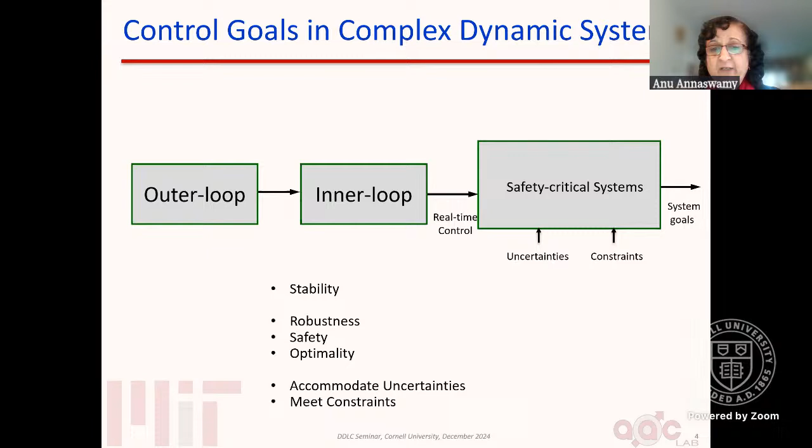So we've been doing this for a while, and we always start with water clocks and steam governors as a starting point. And so the idea of shaping the performance of a system is something that is part and parcel of any of the systems that we have designed, and we have always used data in order to really take that forward. And fast forward several decades, and the same principles are what we explored in the impact of control technology report that Nishant mentioned.

And so the idea here is to show that these control of physical systems are really not relegated to just a few sectors, but it is really across several domains. And in all of the cases, the success stories are really brought to the forefront. And that was basically our thinking in these reports that we wanted to showcase. And there's a variety of examples that we drew from different kinds of applications. And that's what you see in here.

And so we wanted to go on to talk about not just these kinds of sectors where traditionally people have looked at it, but the ones that went beyond and looked at various kinds of smart infrastructures. And all of these are basically providing a nexus between the digital and physical worlds. And it's not, of course, surprising to see that the boundary of what controls can do extends far beyond. And so we also looked at how societal scale challenges can be addressed. And indeed, many of the things that we're doing really sit squarely in the middle of these kinds of endeavors and are integrated with these societal drivers.

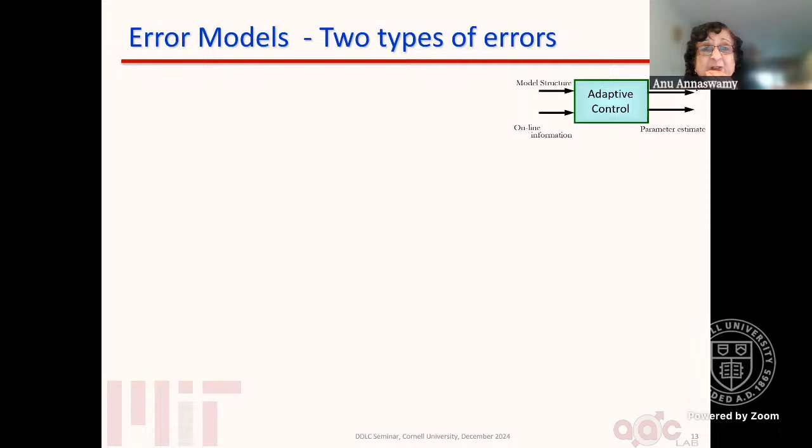So let me walk you through some specific example. And the way it does that is really to look at it from the point of view of two kinds of errors. And so you look at the model structure and the online information, and all of that gives you something called a performance error. It's something that you can measure and you can reduce, and it's something that needs to be reduced. Whereas the other kind of error that is implicit in it is the one that you're trying to get rid of. It is the parameter error. And so it is unknown, but because you adjust your parameter estimate, you can basically adjust the parameter error.

So how do you design the learning rule in a way so that this performance error is reduced is really the way in which the storytelling happens in adaptive control. So these quantities, the parameter error that you have and the performance error, are not always related through a simple structure. It really depends on the underlying dynamics and the underlying complexity that you have in the system. So the error model is the entity that basically relates these two.

And therefore, you have to be able to contend with the kinds of complexities that you have in this W of S, which might not even be just a simple dynamics. It can have nonlinearities, et cetera. And so how do you then leverage the structure that you have to design the learning rule? You could translate the problem of designing adaptive control systems into the goal that I have listed over here.

For example, if you have a very simple linear regression problem, and even though it's simple, it actually is ubiquitous. It appears in a whole bunch of estimation, prediction, learning, optimization problems. And so if you have that kind of a relation, you leverage the structure in order to build an estimator. In this case, the performance error is just the difference between y and y hat, the actual output and the estimate. Now, the parameter error is the difference between the unknown parameter, the linear regression coefficient, and what you estimate it to be.

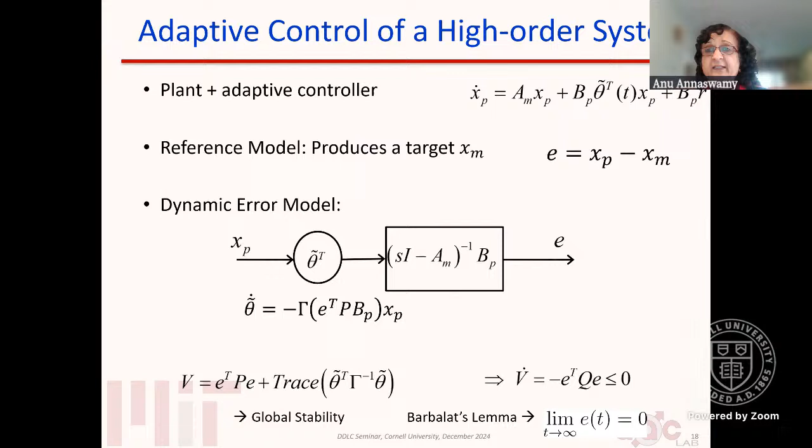But without going into all of the details, the big picture here is that here is a learning rule, and that learning rule is something that was specifically constructed using the structure of the dynamic system, yet it is able to come up with a control strategy for dealing with a parametric uncertainty that occurs in real time. That's sort of the story in here.

So the same kind of idea can be extended even when all of the states are not accessible. So when you have, say, for instance, just a transfer function, and that transfer function is the one that sits between the input and the output, and it's still linear. Problems are still linear here, except that now you have to figure out a way of stitching together a controller with an observer, and that's what the structure is.

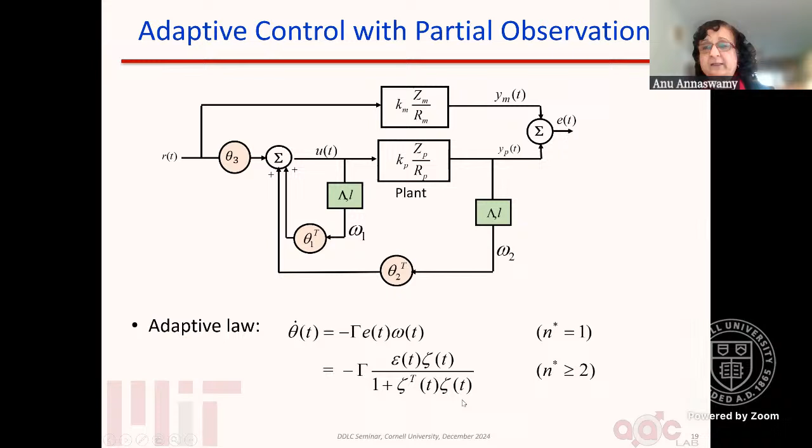And here is the adaptive law that basically looks at the error E, and it collects all of the states that come from this particular observer structure, and that simply turns out to be the answer. The problem becomes a little bit more complicated, I'm not going into all of the details in here, when there is more lag between the input and the output, but suffice it to say that one can design these adaptive rules. And you can show that the performance error indeed goes to 0.

Now, you can extend the story to when you have nonlinear dynamics as well. And so if you have an unknown nonlinear system that looks like this, then you leverage some structure, and often there is an underlying linear parameterization that sits. And so in that particular case, you can leverage that linear structure in order to design the nonlinear control rule.

And you can have the certainty equivalence principle basically carry over, which is that even though you design this feedback linearization with unknown parameters, you simply staple together that control structure with the parameter you replace by its estimate, and that will lead you to the solution. And you can come up with a rule for adjusting the parameter estimate. And when the feedback linearization structure is not available, you can actually leverage.

So okay. Before I go to that, certainly here we assume that the phi of x is known, but sometimes that's often not known. But you can sort of see elements of connection to neural networks in here, in that if you have a linear single layer network, that basically is what we are saying is the structure of the nonlinearity. And so if that assumption is valid, then the adaptive rules that I'm talking about here are valid.

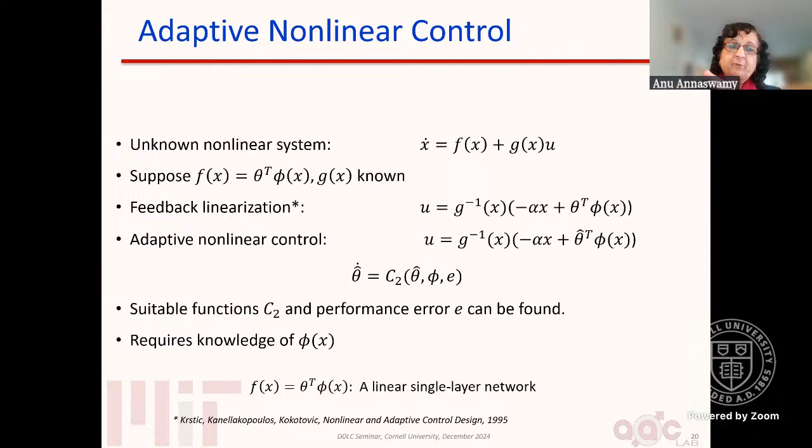So there are many other such extensions that people have derived. And that really is articulated very nicely in this book, which was written again a few decades ago. And that basically expands on the notion of feedback linearization and says, even if you don't have that structure, you can use this technique called backstepping that allows you to essentially keep propagating the analysis backwards until you actually design a control system where the actual input shows up, and that backstepping allows you to figure out what that process is by which you recursively keep tweaking your Lyapunov function candidate.

So just to give you a very specific example, okay, now that I've told you that there's a theory and that there's a body of work and that it's articulated based on some rigorous analytical principles, a lot of which are built on stability notions and, of course, Lyapunov stability. And there are other kinds of stability characteristics that people have leveraged as well. I just want to sort of shift gear a little bit and show you what is it that happens when I actually implement an adaptive controller.

So this is the one that I just want to show you, a short video, and hopefully it'll play at your end. And so what you will see is a quadrotor. And the quadrotor basically is controlling, you want to hover. And the challenge is basically that a part of the propeller blade breaks. And so that's the real-time anomaly that occurs. And so you want to be able to adapt to it. So I'll start off the video where you'll see a controller that is not adaptive.

Are you all seeing the image? Okay, I'm not playing the sound.

I don't think it's relevant, but you can see that it crashed because there was basically an asymmetric moment. Now, this is the adaptive one. And so even when the propeller blade snaps, you can see that the way we instituted that was to have this little razor blade pop up and cut a duct tape which basically reduced the moment arm, and that basically led to a roll imbalance, and then there was a yaw as a result, et cetera, et cetera.

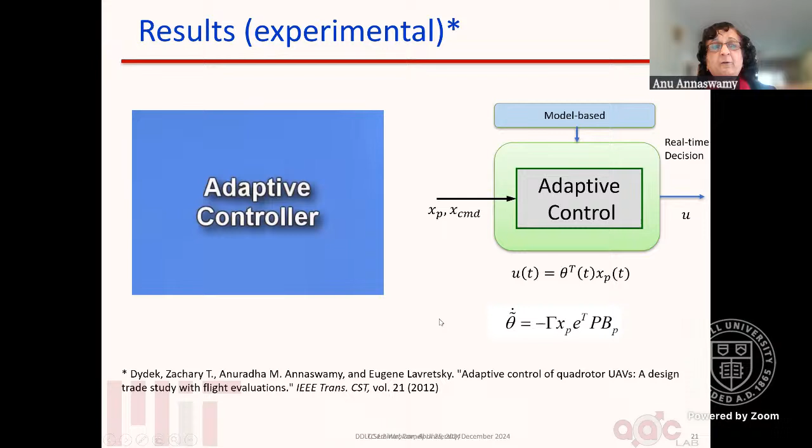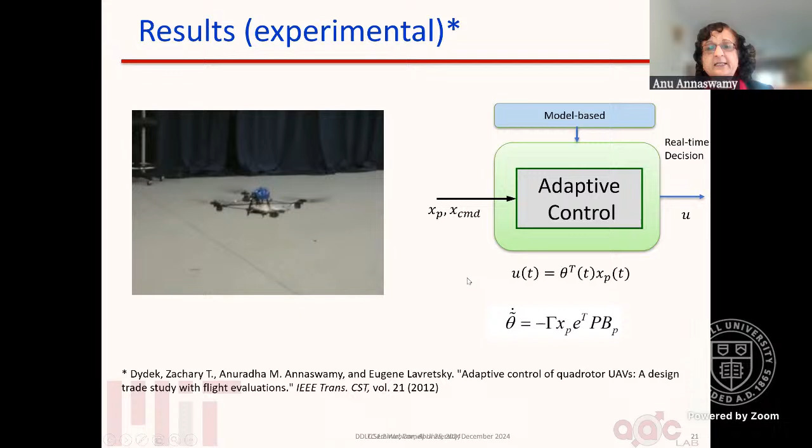So that's the kind of performance capability that the adaptive controller has, where this kind of an anomaly is prevented simply because of the software capability. This is the only difference, that the parameter estimate is adjusted rather than keeping it fixed.

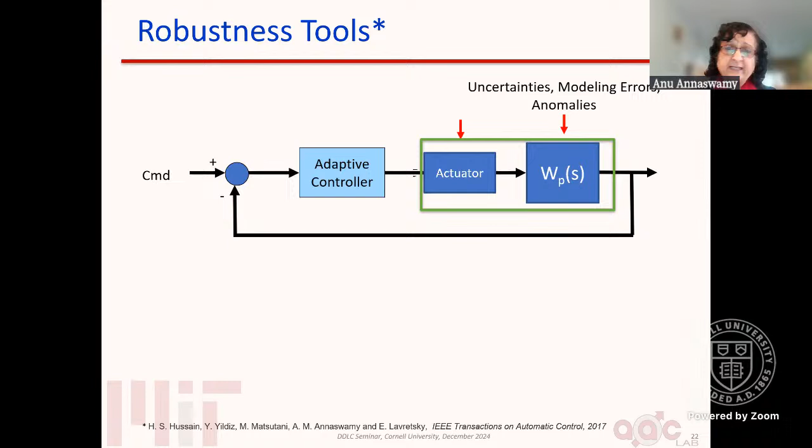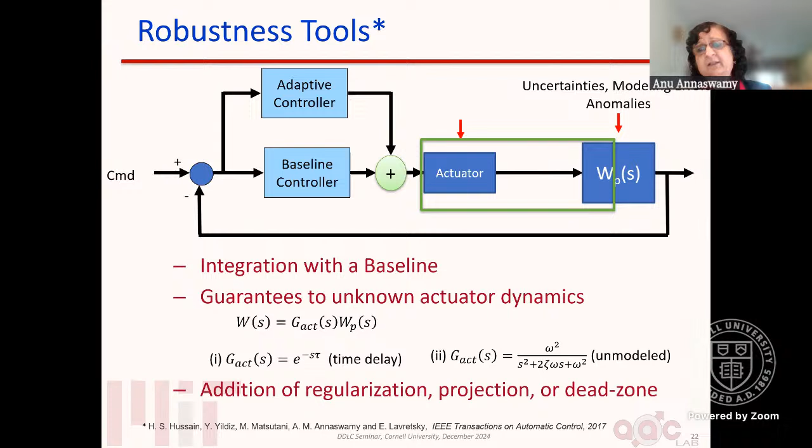So building further on these things, we can then have additional unmodeled dynamics as well. And these unmodeled dynamics basically are things that could happen due to unknown actuator dynamics, either time delay or because of higher order dynamics that are neglected. And it turns out that you can come up with a strategy that still keeps everything bounded and robust adaptive control is possible. And this is through adding regularization or a dead zone, or actually projection works out very well. We can also accommodate input constraints in the form of magnitude and rate saturation.

So here, for instance, the main idea is that all of these adaptive systems basically function in the form of an adjustment in the learning rule. And the adjustment in the learning rule basically is ensured by having a performance error as a target. So the construction of the performance error is important, and the construction should really be based on things that you can actually attribute to parametric uncertainties, right?

So when you have a saturation, the question is, is that something that you adapt to? Because it's a disturbance, right? It's something that is unintended. So you really should not adapt to it, and therefore you should modify the performance error. And that basically is what we did. And so in this particular case, the performance error is modified in some specific way. And when we do that, we actually can accommodate this magnitude and rate saturation.

And not only have we developed all of the fundamental principles for it, but a whole bunch of papers have been written where we explored it in various applications, in positioning systems, in combustion propulsion systems, in aircraft systems, and in all of them, it actually performed very well experimentally.

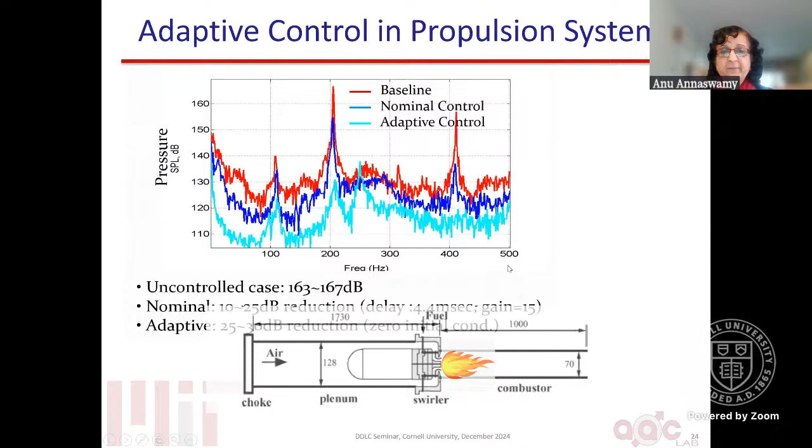And the really wonderful thing was that when we introduced adaptive control, which is the cyan color curve, and this is an experimental result from an actual Rolls-Royce scale rig, we were able to reduce this. Let me see if that goes away. Yeah, we were able to reduce the amount of acoustic resonance significantly, by 30 dB, where the adaptive controller knew absolutely nothing about what the system was doing, with no knowledge except for the model structure. We didn't know anything about the modes or the actual frequencies that were being driven to resonance.

This is the example with high-performance aircraft, where the idea was to not only have the angle of attack and the elevator angle act as a control input, but we also wanted to make sure that it honors a rate saturation limit. So you can see that our algorithm does generate a solution which makes sure that the performance is still reasonably okay, but it follows the command by keeping to the elevator limits.

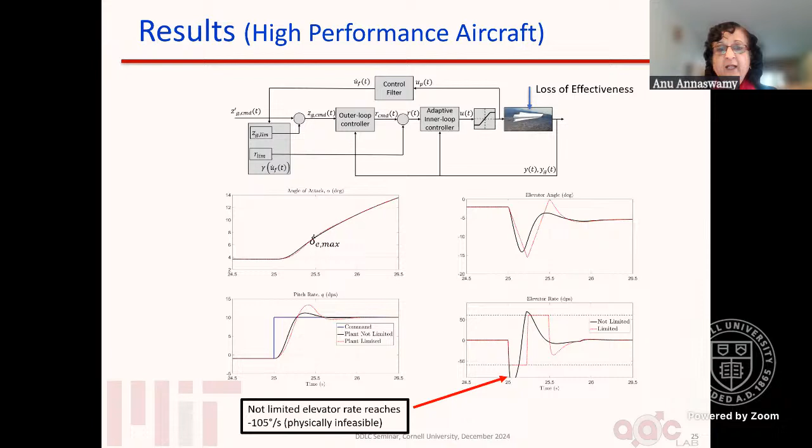Because if you don't do that, you're really going to burn out the elevator, and that's something that you don't want. And this is for a high-performance aircraft with high fidelity. And so you can see that something that is physically infeasible is avoided by having our algorithm, which accommodates the result.

And this is not the only example. There's been any number of platforms where people have done actual flight tests where adaptive control has been implemented in one form or another. And all of these are, of course, uncrewed flight control applications, and they all have led to improved performance and reliability. So that sort of sets the stage for what adaptation can do.

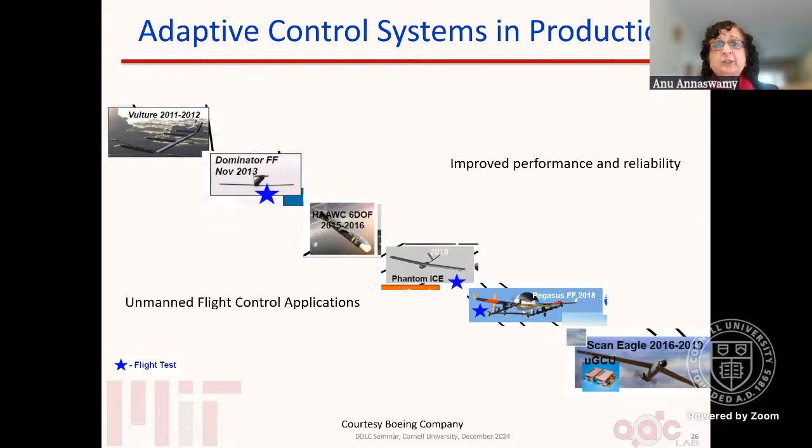So now let's talk about learning, right? So learning has always been part and parcel of any adaptive controller. We've always required that parameters which are uncertain are learned. So it's not an afterthought saying, oh, I'm going to do learning now. No, learning has always been a part of adaptive control.

And the learning occurs in the form of learning the unknown parameter. So there's a theta that is unknown, and that's the uncertainty, and you're trying to learn the theta, right? So this is what adaptation is all about. So remember that in all problems, if you're going to talk about a parameter that is unknown, and that's what is causing the uncertainty, then there are two separate goals here. You're trying to make the aircraft go somewhere. That's a control task. Or you're trying to learn the unknown parameters that are part of, let's say, the actuator. That's a learning task.

Now, one need not imply the other. And this interplay between the conditions that support control and the conditions that support learning are two different questions. And there are sometimes trade-offs. And this is what adaptive control has examined over the past 4 or 5 decades, right?

And it's also very clear for us why we want to learn the parameters. Because it gives you robustness, right? Because a small change in a parameter can lead to a huge change in the state space. And therefore, if you want to make a precise real-time decision, parameter learning is important because it gives you robustness guarantees. So this is very, very important to keep in mind.

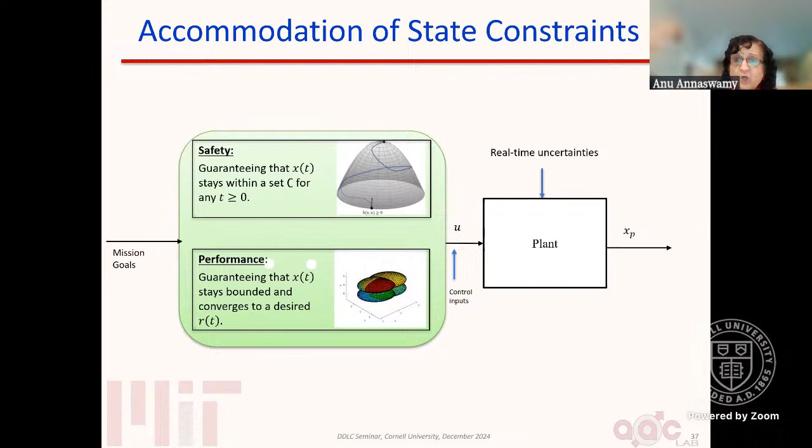If you now go on to, okay, now let's talk about, all right, I figured out how to learn the parameter. I figured out how to be robust. What about safety? Because it's not always just making sure that your performance is well behaved. It's also that you stay within a certain set, which means you have to accommodate state constraints, not just input constraints, not magnitude, not just rate, but also that your state should not wander off to some region, should not hit an obstacle, should not enter a stall region. How do you do that and make sure at the same time this can be done?

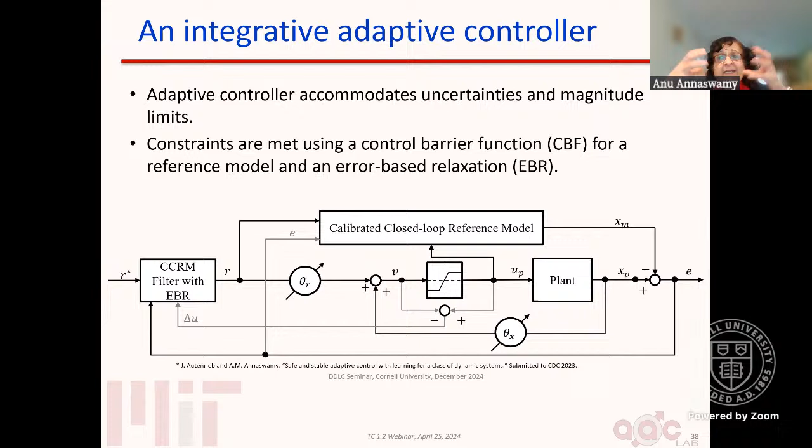So we've developed an algorithm, an integrative adaptive control, where we've been able to take the adaptive controller, which is sitting here, and combine that with ideas from using control barrier functions and appropriately integrate them with some coupling effects here and there. And without going into the details, which you can look up in the paper, here is an example.

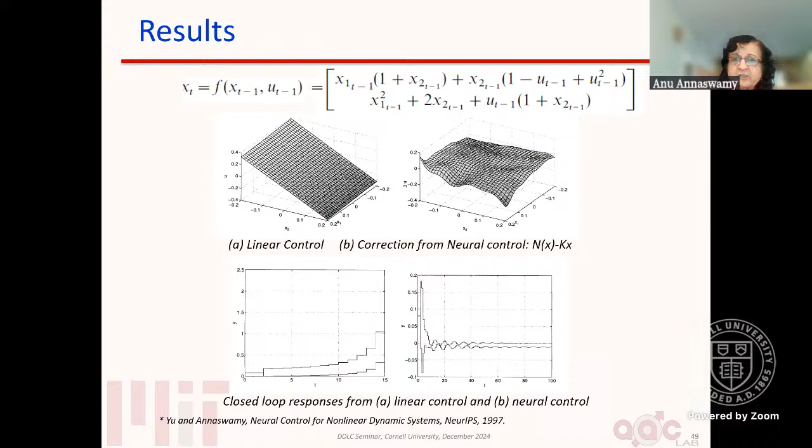And very similar kind of overall philosophy, but implemented in a very different way, is the safe RL result that was also in the same well-known conference, NeurIPS, but 20 years later. And that was the one that is listed at the bottom. And here, too, the idea is very similar, where you are trying to combine a particular loss function with a Lyapunov function type of level set. And that's what the V of C is in here.

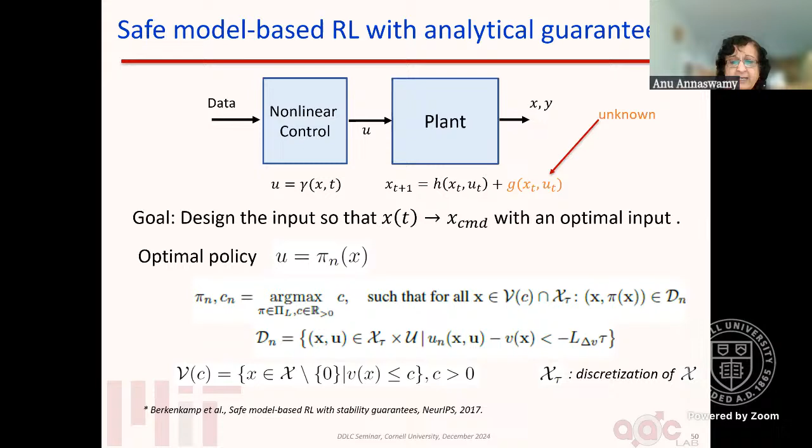And so essentially, the policy that was designed is determined in such a way that it always keeps all of the state variables inside a level set. And by doing that, they were able to show that this optimal policy can be suitably trained. And this theorem basically says that there is a certain region of attraction, and that region of attraction is guaranteed for this particular nonlinear system, provided the training procedure has elements of this Lyapunov function integrated in this particular way. Of course, there's a lot of details, which I will let you peruse at your leisure.

But the idea, again, is that one can indeed get these optimal solutions by appropriately borrowing elements from nonlinear optimal control and reinforcement learning. And you have to do it carefully because not all RL-based policies are going to give you stability guarantees. So one of the things that we did was basically to exploit the structure and leverage the power of RL with adaptive control in the following way.

The thing about RL is that there's a lot of offline training, and that offline training basically gives you the policy, right? So that's what we're calling U sub R. We then said, okay, you can collect all of that and do the offline learning, but then the online adjustments are done using adaptive control. So you have an original policy U sub R, but then you're bringing in all of the corrections to that in the form of an adaptively designed component, drawing from many of the principles that I showed you in the earlier slides. So when we do that, we can actually show that this performance error goes to 0.

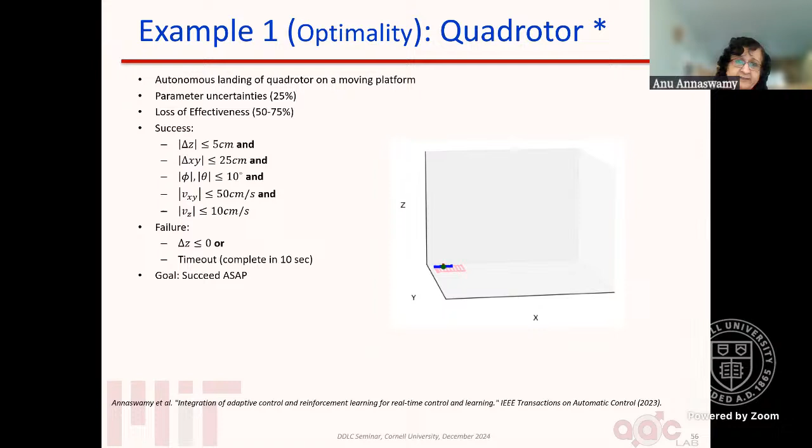So it's a complex cost structure, not something that you can always encapsulate in the form of a quadratic cost. And therefore, it's something that becomes really challenging for many of the optimal control methods, right? So we picked that. We then compared it with two different kinds of designs, both of them with a 50% loss of effectiveness mid-flight, very similar to the video that I showed you. And if you do only the RL design where you don't accommodate the fact that you have any kind of stability guarantee, then it turns out that it actually crashes.

And on the right side is the video that corresponds to the simulation where you have adaptive control that also is introduced in the inner loop. And when we do that, we can actually not only accomplish the stability goal, but you can also accomplish that in the time that was specified. And you can see the performance comparison here, where we increase the loss of effectiveness from 0 to 75%.

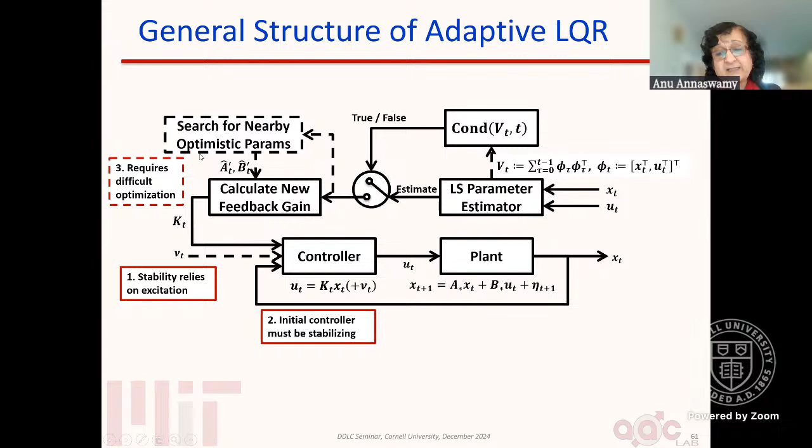So then there is some sort of an excitation, right? And not only that, whenever you try to search for a better set of parameters, the optimization that you have to perform is very difficult. So all of these things introduce challenges. So can we develop an algorithm that doesn't require any of them? And we have a result that says that, yes, you can.

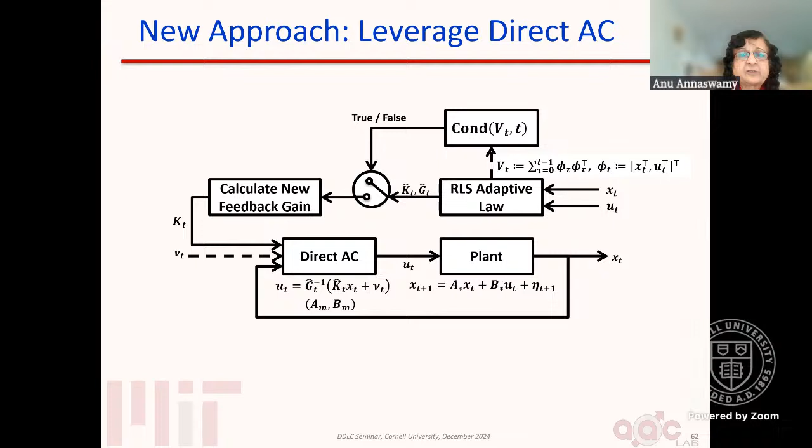The way we do that is to have a slightly different parameterization for the adaptive controller based on a direct approach. This G hat and K hat is designed in a very specific way. We have a recursive least squares-based adaptive algorithm that computes this, and we adjust K hat, G hat directly instead of computing A hat and B hat and using that to calculate the control parameters.

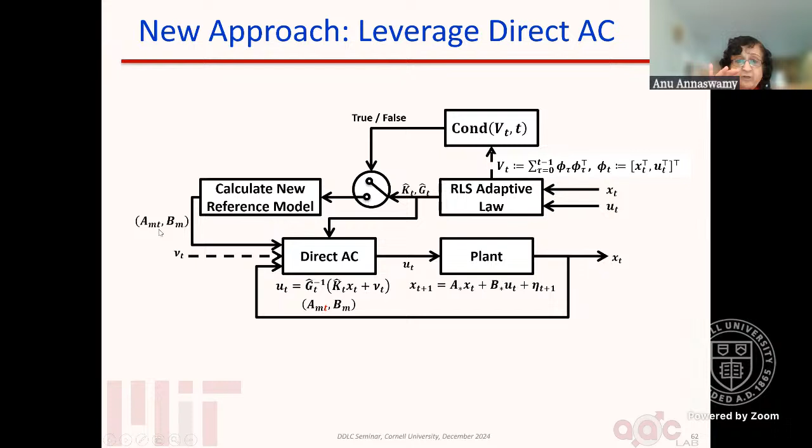Every time we use this exploration data and have a full rank information matrix, we then calculate not K hat, B hat, G hat directly, but a new reference model. This new reference model gives you the right target, and then we repeat the whole process. So this is really what we do.